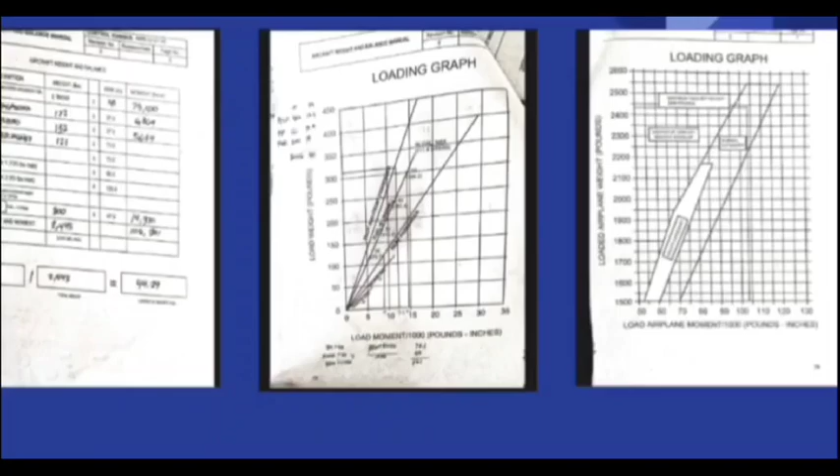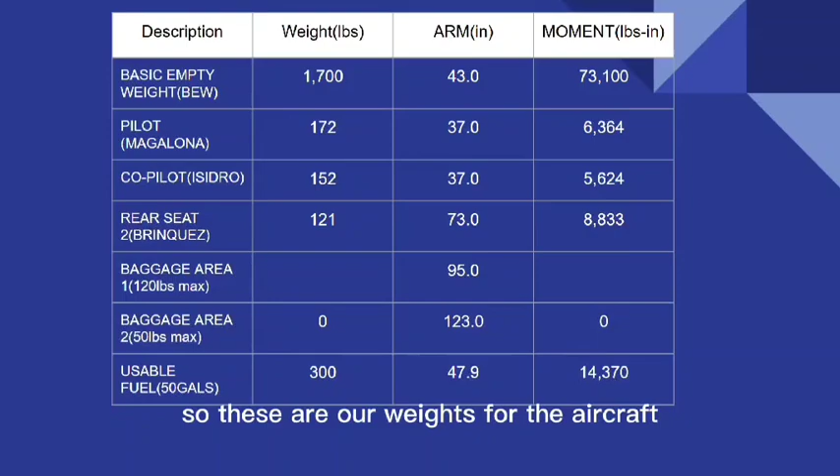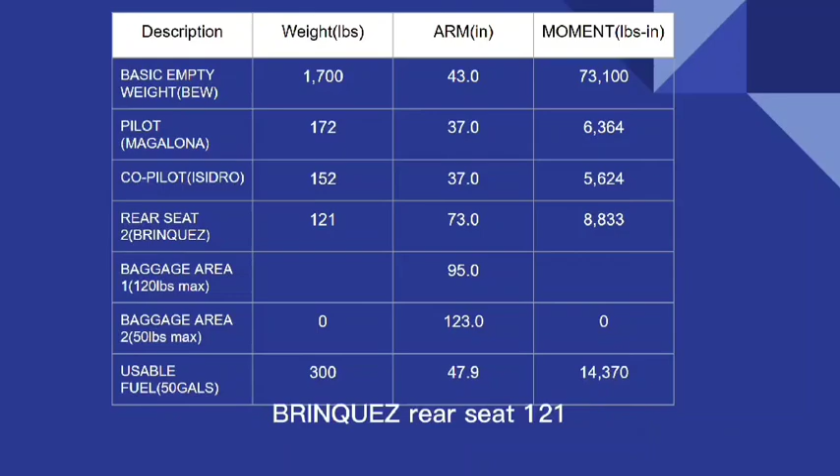So these are our weights for the aircraft. Basic empty weight is 1,700 pounds. Pilot Magalona 172. Co-pilot Isidro 152. Brinquez rear seat 121. And usable fuel from 50 gallons times 6.

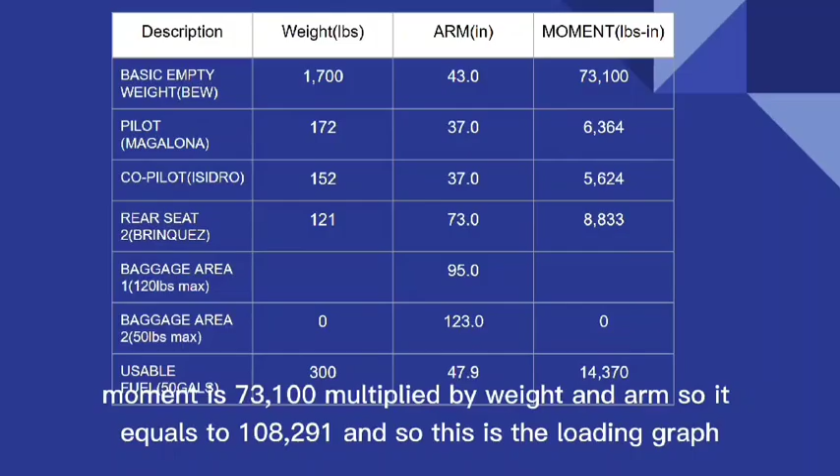Moment is 73,100, 6364, 5624, 8833, 14,370. So it equals 108,291. So this is the loading graph. Our maximum weight is 2,445 and total moment is 108.

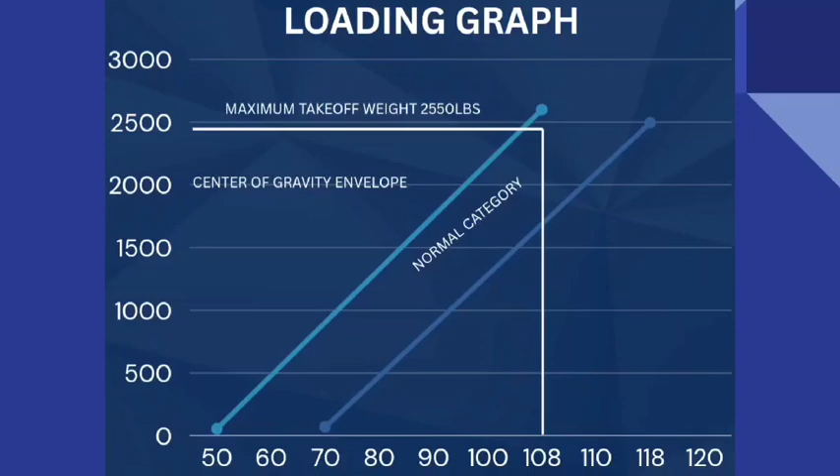Aircraft loading sheet and planning, final takeoff weight and CG calculation. The final total weight and moment are found by summing the values from the previous slide. CG calculation equals total moment over total weight. So this is just the description, total weight and moment.

The weight is 2,445 pounds and total moment is 108,291. So the maximum takeoff weight is 2,550 and it is within the limits. Our value is at 2,445. The center of gravity solved from total moment over total weight is 44.29. The aircraft is within the limit.

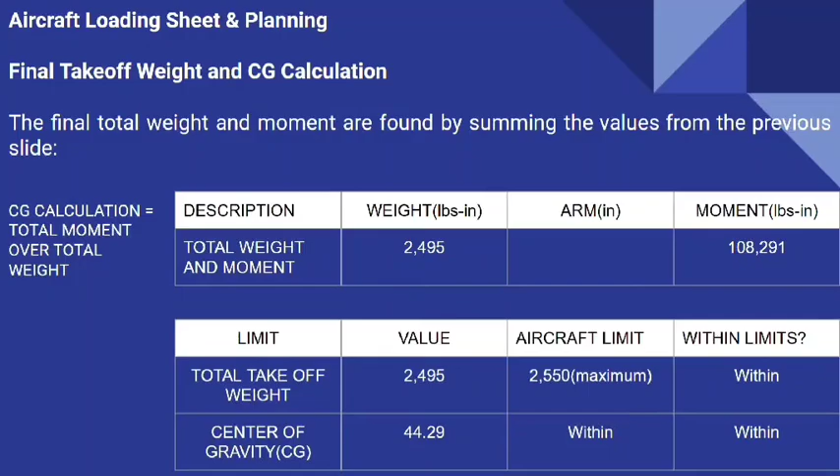Conclusion and explanation. Weight and balance procedures. We conducted a standard aviation weight and balance analysis determining the total weight and total moment of the load configuration, basic empty weight, occupants, maximum fuel, and equipment. The center of gravity was then calculated by dividing the total moment by the total weight.

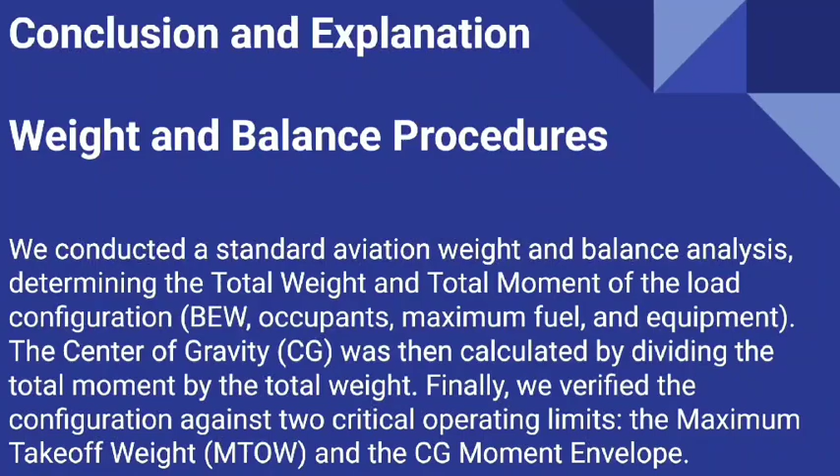Finally, we verified the configuration against two critical operating limits, the maximum takeoff weight and CG moment envelope. The total aircraft weight successfully met the maximum takeoff weight. We confirmed the configuration by plotting the results on the loading graph. The result is that when plotting, the point falls within the normal category CG moment envelope.

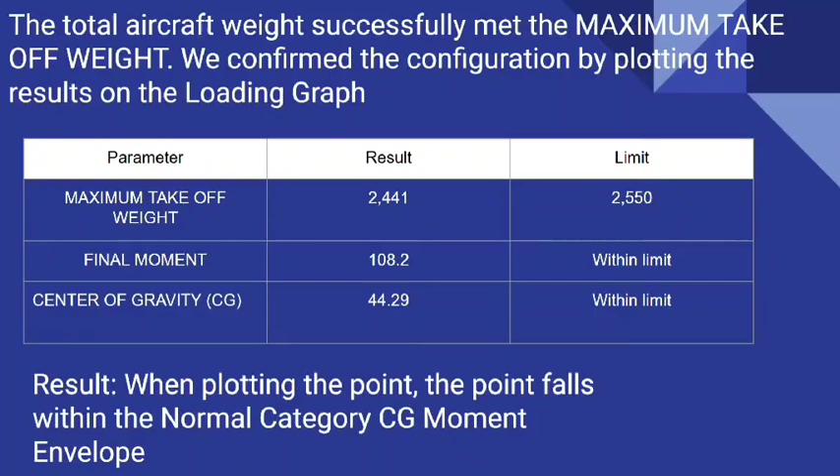Conclusion: this load configuration is compliant as both the takeoff weight and the center of gravity are within the limits. And that is all. Thank you.